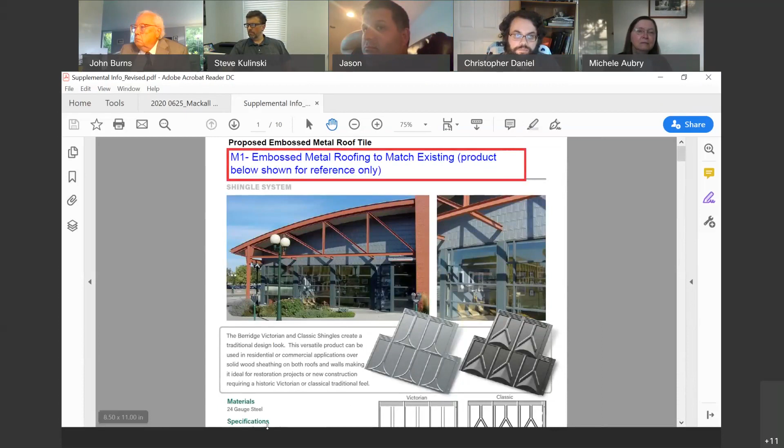Pardon me for interrupting, Laura. Do you know— there we go. The question was, can the documents be presented? And do you know, Laura, if the pictures are going to be presented also of the windows that we took? Were they in the submission package? Yes. We have one of— it was a different folder because I did not put everything in one folder, it would have gotten too big. I sent a folder that only had pictures. Okay, let's see if I have it. ARB members, were you able to see the photos as submitted? I did not see any photos. Okay, no.

Nicole, I'm going to try to look for the photos. So if there's anything on the presentation that you want me to go to, just let me know. Apologies, I only have audio, so I'm not sure what you're even reviewing at this time.

The application is virtually the same. I guess we clarified what materials were going in each location as part of the submission package with the materials key.

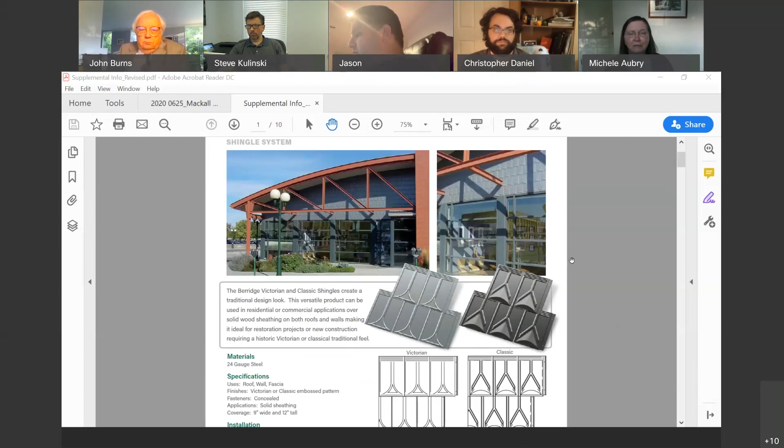Yeah, as we had been saying, that's just an example. That's not the actual product or the design. We'd need to match up to what was there, that's the intention.

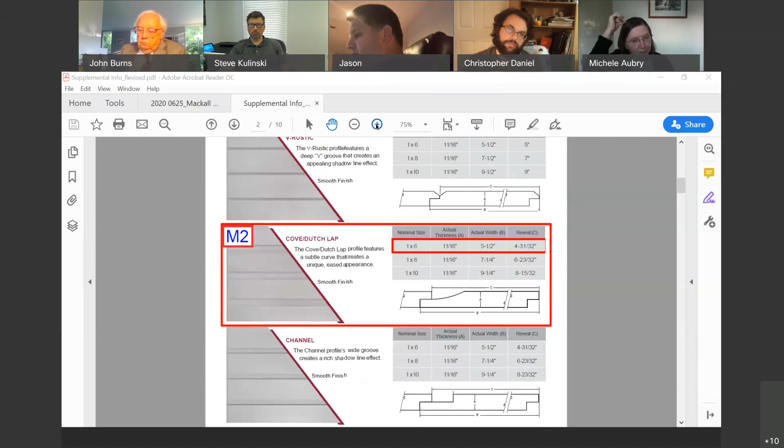The second page is the cove lap or the Dutch lap siding that is within fractions of an inch difference from the existing, which was below the cedar shake or wood shake siding applied at a later date. That's M2, material 2, which keys to our elevations.

Understood, previously there was some desire to understand what each material was going to be, so we tried to clarify that on the elevations as well as through the supplementals.

This next slide, page 3 of 10, is the proposed flat stock trim for the corner boards, pretty much the exposed trim we propose to use. This is also an AZEK inert material product that would not be a rotting material.

This is rot resistant. I think on the key on the elevations, we indicated all of these to be smooth finish, so there was no ambiguity or mix-ups at a later date in the field.

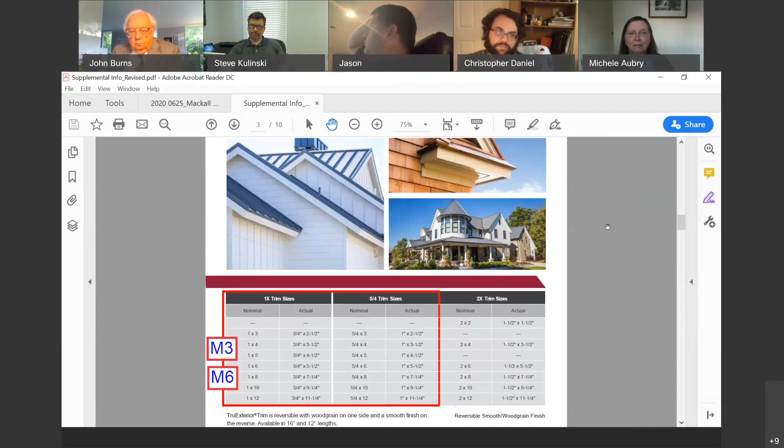Then the next, 5 of 10, is the windows. We're proposing to use that double hung product as a replacement by Loewen, with a putty profile, 5/8 of an inch, low E double glazed glass.

The next page, I'm sure you're all familiar, I think we looked at it last time. 7 of 10 is the photo from 1918 of the house, showing the little porch on the front, which we discussed last time that we're bringing back to the project, and the cove lap siding.

Here's the next one, the blow up of the existing cove lap siding, which is in disrepair in several spots and also missing. So we're proposing to replace it throughout with a matching product, the AZEK.

9 and 10 is just the flat stock casing, which we would be matching in the AZEK product. And then 10 of 10 is the embossed tin roofing, which links back to the first page. As you can tell, that's what's on the house. We believe it's maybe not original, but that's a good material maybe to retain.

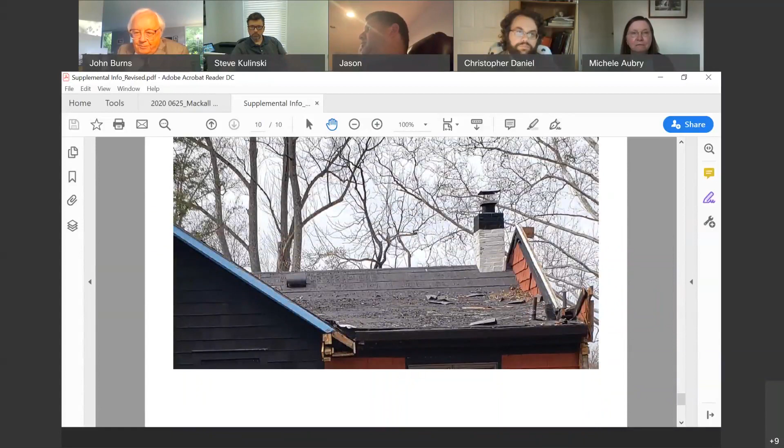Okay, is that your presentation? Yes. Okay, I guess the plans more or less remain the same from the previous time. It's just clarifications to the materials as requested by the board.

Okay, thank you. The first question is, are there members of the public who would like to address the ARB in this particular application? Laura, can you keep an eye out if anybody raises their hand? Yes, I will.

I don't see any at this point, but I will let you know if that changes. That being the case, I will go through the roll call of members of the ARB for any questions or comments they might have.

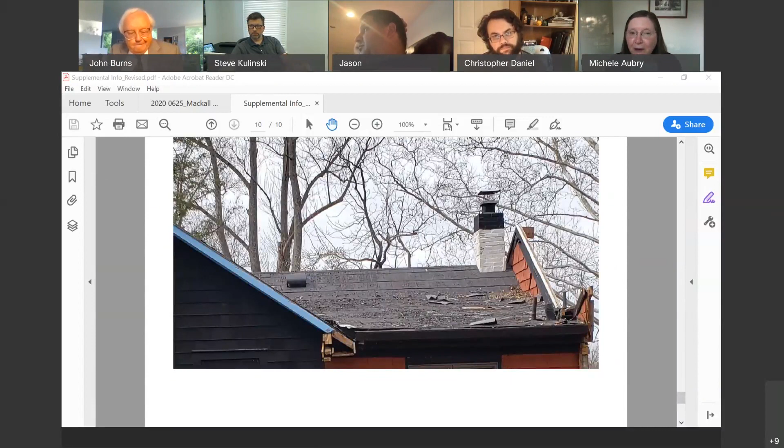I'll start with Michele Aubry, please. I'd like to thank the presenters for the information and the follow-up, and I have no questions for them.

Thank you. Okay, Mr. Daniel. Again, I'll echo Ms. Aubry's comments. Thank you to the presenters for working through this interesting technological time we're in. So I guess I'm trying to understand the presentation about the windows. From what I understood, we've evaluated that many of the windows were not original. There are some remnants of what might be original, but the materials, from the architect's perspective, were not considered enough to salvage. Is that the understanding I was coming away with?

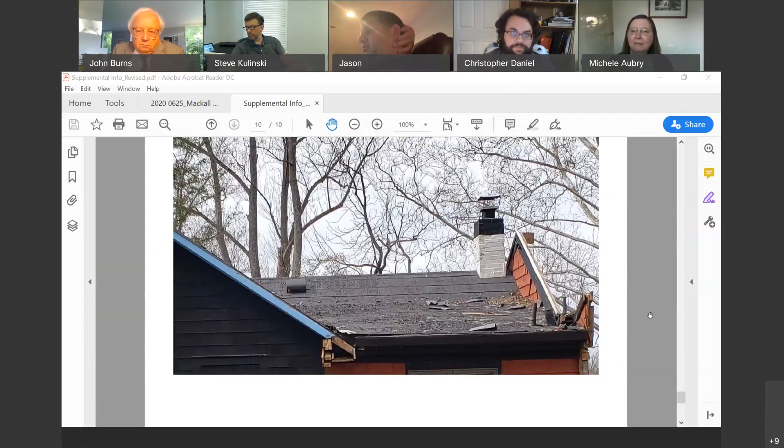Beyond that, I appreciate you bringing in the materials. Obviously you're matching the shingles on the roof, and I don't have a great deal of questions at this time. I'm honestly just happy to see if this house is going to get a chance at life, because in previous reviews for previous projects it seemed like it was going to be condemned, put on the chopping block. So I'm happy to see that it's going to get a new life. I don't have any further comments at this time, Mr. Chairman.

Okay. Samantha Huang? Yes, thank you for the presentation. I have no comment.

Okay, Mr. Kulinski? There we go, sorry about that. I'm satisfied with the changes that have been made over the course of the couple of workshops here, so I'm fine with this. Thank you.

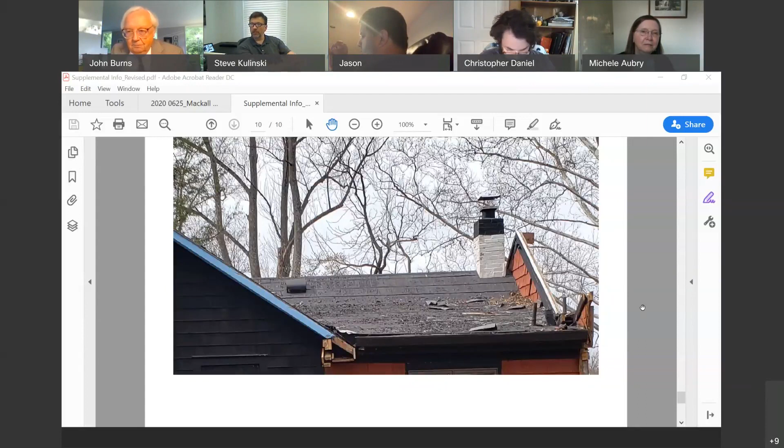Okay, Elise Murray. I want to thank the applicant for hanging in on what has been a very long road. I'm very happy to see where it's going now. That's the end.

Okay, Kate Orr. I think it looks lovely. Thank you so much for your hard work.

Mr. Zellman. Thanks for the presentation, but no questions. Okay, I have a question.

Nicole, could you go back to the photograph of the cove siding? It's an end view of a piece. There you go. And that one, we clearly see that you're able to take dimensions and such on that. I'm wondering how close is the proposed replacement siding to the actual dimension of what we're seeing in this photograph?

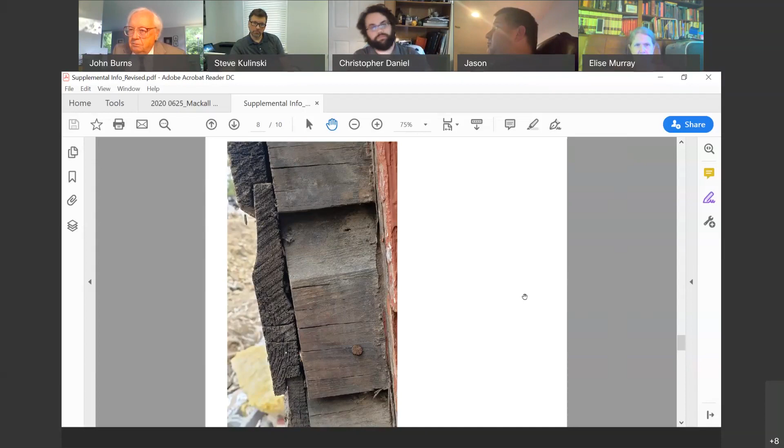Yeah, it's remarkably close, which is very unusual when you have the difference between wood versus the other. But I'm assuming they patterned it off the differences. I believe the cove is a little bit different, and I believe the flat portion of the original, where I guess it was hand done, is a little bit longer. The overall length, I believe, is within a half an inch of the modern replacement product.

Okay, thank you. I just wanted to make sure that they were not dramatically different, because that can affect the visual appearance quite a bit. Other than that, I will echo the other members of the board. Thank you for doing that. Thank you for specifying that the trim will be installed smooth side out. That was one of my questions from last time around. Thank you for verifying the age of the existing windows. For me, for my purposes, that's adequate justification that they can all be replaced without compromising the historic character of the property.

That's the end of questions from the board. I would entertain a motion with regard to this particular application.

Mr. Chairman. Mr. Daniel: So Chairman, I move that the ARB approve ARB 18-LFK-06 amendment located at 1011 and 1013 Turkey Run Road, tax map 22-3, double paren 1, 50 and 51, located in the Langley Fork Historic Overlay District, for the proposed architectural modifications to the existing Mackall house as submitted and presented at the July 9th, 2020 ARB meeting. Upon review of the materials, the proposal is found to meet the requirements of zoning ordinance 7-200 historic overlay districts.

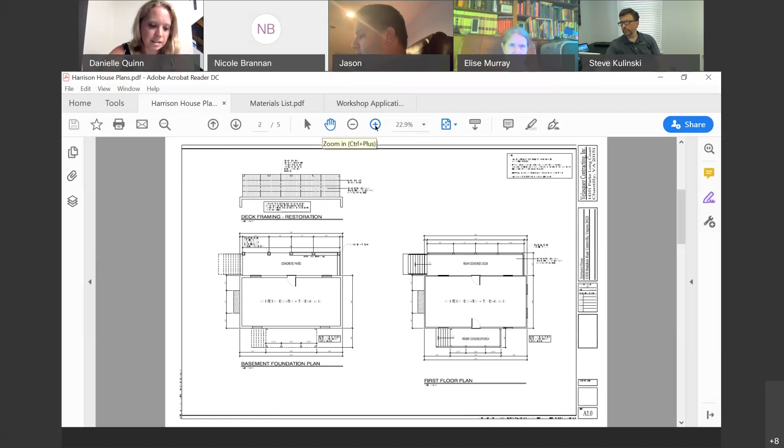On the Harrison house, what we're looking to do is replace the back deck that is completely rotted through and no longer stable. So as you can see from these plans, we'll be securing the joists that support the deck, be taking out all of the deck rails as well as the footing on the deck and replacing that with identical wood, sealing it and painting it with a natural sealant in order to preserve the integrity and the historic nature of the deck as it has been. Our plan is that when the deck is finished, it will look identical to how it has for the past few hundred years that the house has been there.

The concrete patio that's below as the foundation won't change. We'll just go ahead and seal that to keep any water from getting inside. Also provided in the packet that was provided to the board is our materials list. As you can see from that list, all of the deck posts that go in will be cut to the exact dimensions of the ones that are currently there. Nothing will change as far as the size and structure goes.

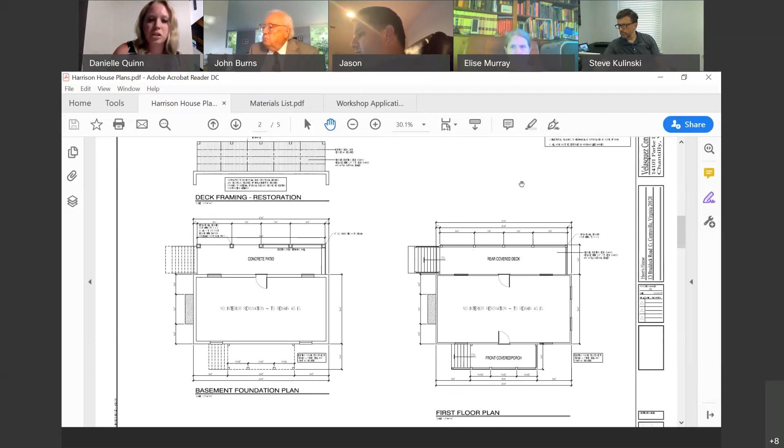The other proposal before the board is for the chimney. What is the main thing that's changed on the chimney is once our architect came back and looked at it again, he put a level on the chimney. And initially it was believed that the chimney was pulling away from the house and there was concern that the chimney was going to collapse. However, the issue is that the house is actually pulling away from the chimney. The chimney remains level, whereas the house is starting to tilt to the side.

To resolve the issue of the gap between the chimney and the house, we plan to pour concrete in that will not only help seal the gap between the two, but help anchor the house onto the chimney. Once the concrete's poured, it will be covered with a sealant to prevent water from getting in between and to prevent water from getting into the house. It'll all be a natural stone color so that you won't be able to tell a big difference from the existing stone chimney and the gap that's being filled.

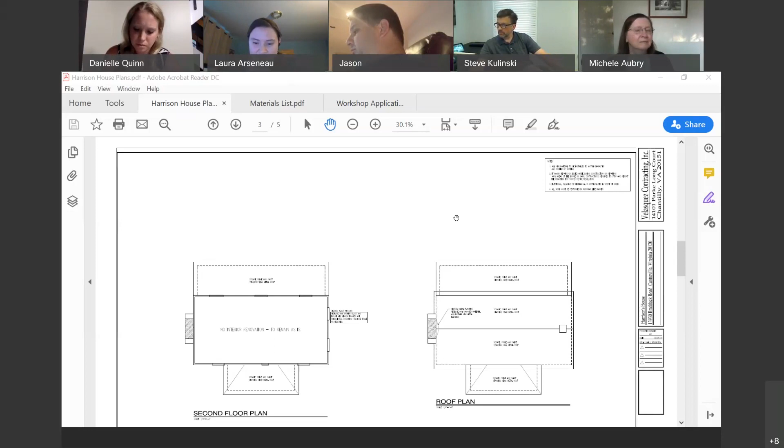I believe that anything related to the decking, and I believe it was the chimney that were in the notice of violation - that's kind of like a phase 1, phase 2 type thing. So the code violation and things in the code violations were the chimney and the deck. So if there's something with the deck and you have a design issue with that, that would be within the scope of this approval.

All right, I think it would be a mistake to use composite materials and kind of dilute the historic nature of this pretty well preserved house. Obviously it needs some maintenance, but most of the historical material is intact, and I applaud the applicant for matching, cutting and reusing beams where possible. But if I were to have my say here, I would say we do not allow the Fypon or the composite decking. The other issue, apparently not in our purview here and not necessarily as pertinent, but the gutters aren't the appropriate style for the house - but it's an item that's easily reversible, so I'm not so concerned with that aspect. But overall, great, and the in-kind terminology is so much better than before. I'm happy to see this. Those are my comments.

Thank you, Mr. Kulinski. Ms. Murray. My colleague on the History Commission from Centreville is very happy that the chimney will remain in place, intact, not changed at all. I share Mr. Kulinski's concerns about the man-made materials for the decking and railings.

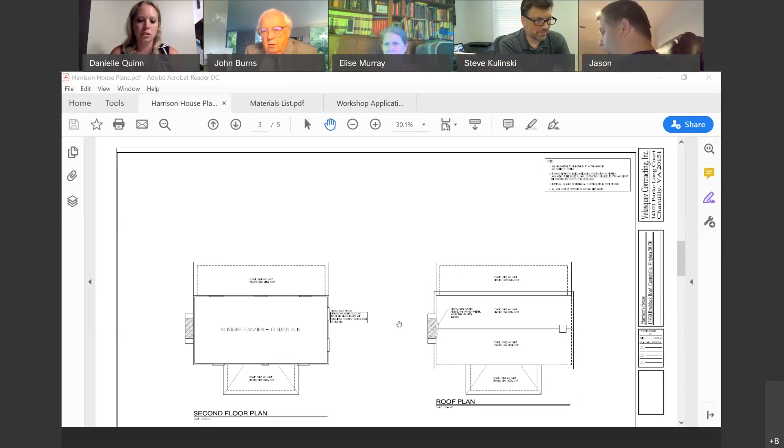What is the purpose of using concrete as that material, as opposed to bridging the gap with, say, wood like the rest of the house? If we were to bridge the gap using wood, then the side of the house isn't going to be flush. It's going to protrude out some, instead of just making it look as if the chimney was a wider structure than it actually is.

Okay, but if the gap filler material is concrete, what is the material of the chimney? Forgive me for not knowing. The chimney is just a stone and concrete structure. So it will look like there's simply a wider mortar joint when you're finished with this treatment.

Is that the intent? That's correct. Okay, all right, I understand that. Thank you for the explanation.

I do share Mr. Kulinski's concern that Ms. Murray echoed about the use of man-made materials in a very visible part of the deck. I understand your concern there, but without access to the owner to actually answer the question tonight, I'm a little perplexed as to how we might deal with that issue that's been raised.

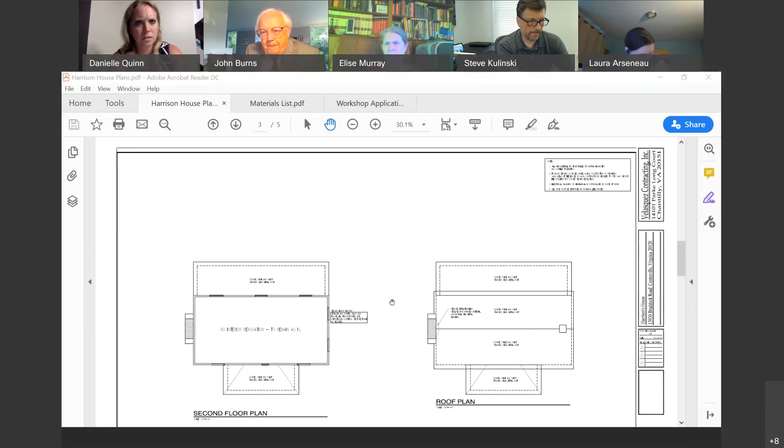Mr. Chairman, I'll note on the document that was sent, it does have the line, 'if acceptable, install composite.' So that does imply there was a recognition that it might not be acceptable, but I don't know where that's coming from. If we need to use wood in order to get the ARB's approval, then we will use wood, the same type of pressure-treated wood that we're using for the posts.

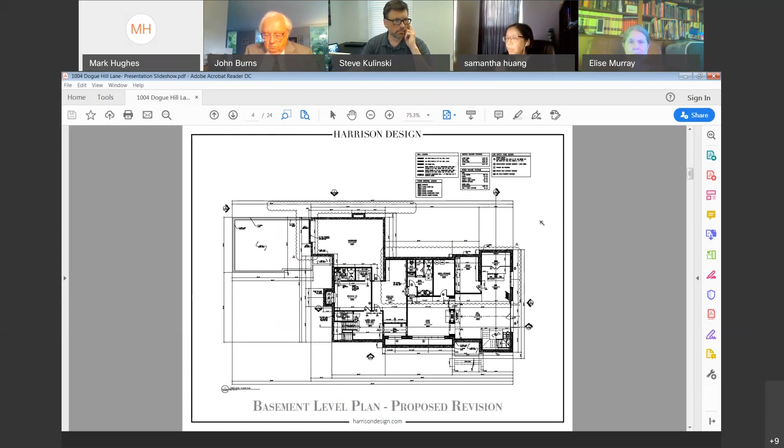So the original floor plan in the basement, after some talk again with the realtor, it was proposed that we actually enlarge the space below the loggia, the upper story loggia. If I flip to the next one, you'll see in the back here, under the loggia, we've increased the floor space, just increasing the square footage of the house. Remember, this is a spec house to be built and sold, so the idea was that it would better serve the clientele, the marketplace. This is a minor change, not something you can see on the exterior at all. It's totally underground in the basement.

On the main level, there are very minor changes. On the right side of the back, there's a study, we simply moved the windows a little bit wider, same size windows, just slid them a little bit wider within the room to make a larger center built-in cabinet, that's all. If you focus on that study in the back, I called it the study, the library in the back there - if you flip to the next one, these windows just slightly moved out to the front and rear wall a little bit, within a few inches.

Conversely, on the main level, in the kitchen, the 2 windows on the left side elevation around the range, we kept them in the same spot, we simply made them slightly larger, slightly wider windows. I believe they're the same height. That's the only changes on this level. Oh, I'm sorry, there is one more change. On the garage, it's kind of hard to see here, on the back, because we've added 3 windows, but these are transom windows set high on the wall, so they're shown dashed in on the concrete retaining wall of the garage rear wall. You'll see those in the elevation. There are 3 windows added there just to get daylight into the garage, and that's on the back of the house.

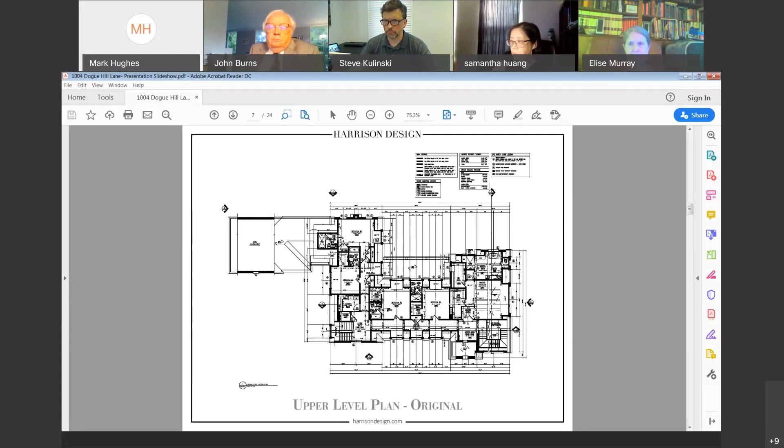On the upper level, the main change had to do with enlarging the master bedroom suite and taking bedroom number 2 into the master bedroom suite, which was laid out in another way to make it a better bedroom. We moved the sleeping area to the rear wall, to the rear yard, so there's a better view than just a side view. We conversely moved the closets around, and bedroom number 2 became a larger master bathroom.

So in effect, on this floor, the change was we went from 4 children's bedrooms plus a master suite to 3 children's bedrooms plus a master suite. That was the main generator that caused the changes on the outside, because some window dormer locations changed.

On the right side of the house, one other thing we did on the upper level was suggested by the realtor, to add a window to the laundry room. The initial approved scheme did not have a window in the laundry room, so we added a small dormer, like the other small shed dormers, into the laundry room, on the left side elevation. We'll see those together as we move through here.

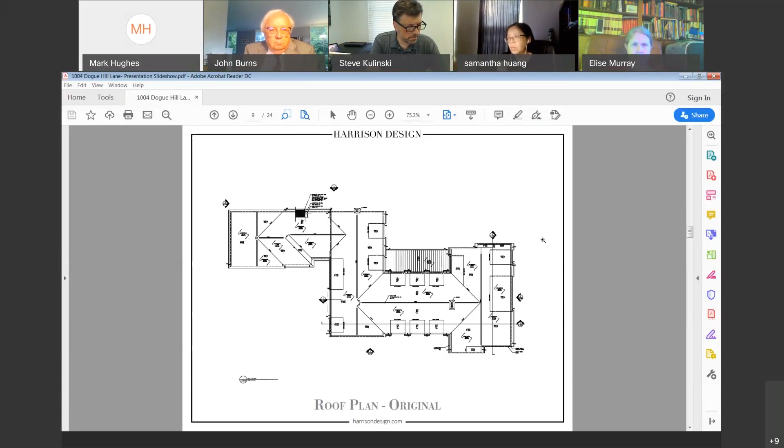You see right now the original roof plan. Basically, on the original plans, all the dormers were shed dormers. Most of the dormers stay in the same place. The ones on the right side changed location slightly, and we thought it was better to make those gable dormers. We also added a small shed dormer on the left side.

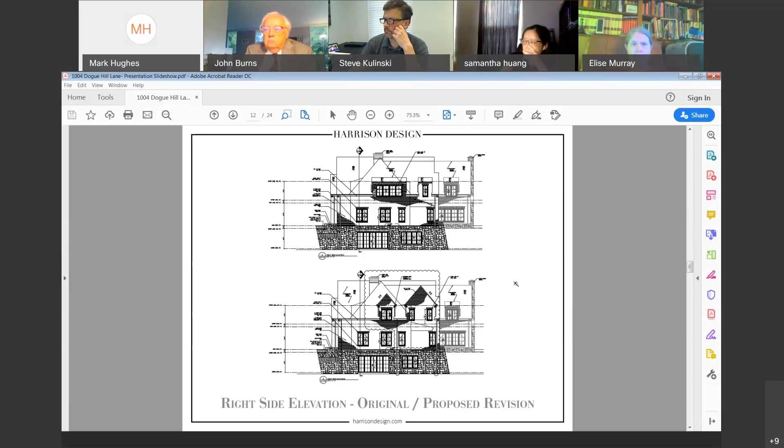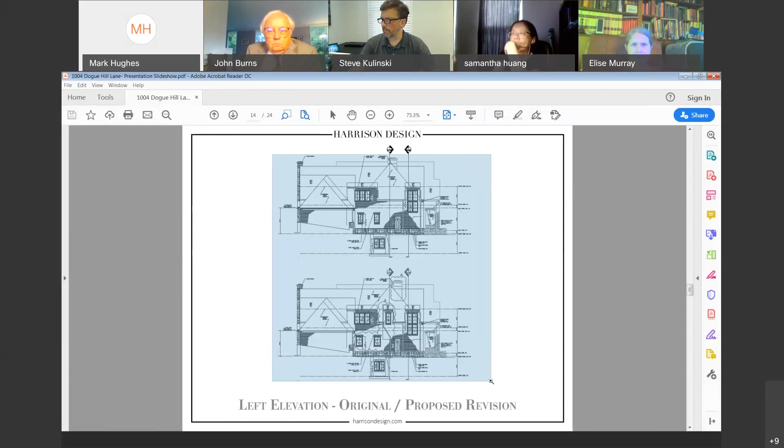And then the last elevation on the left, the upper one, is the original again. The only thing we've done here is inserted a small single shed dormer between the existing other dormers. That dormer is just to bring daylight and view into the laundry room on the upper level. That's the only change you can see there.

The site remains the same. Nothing changes with the site.

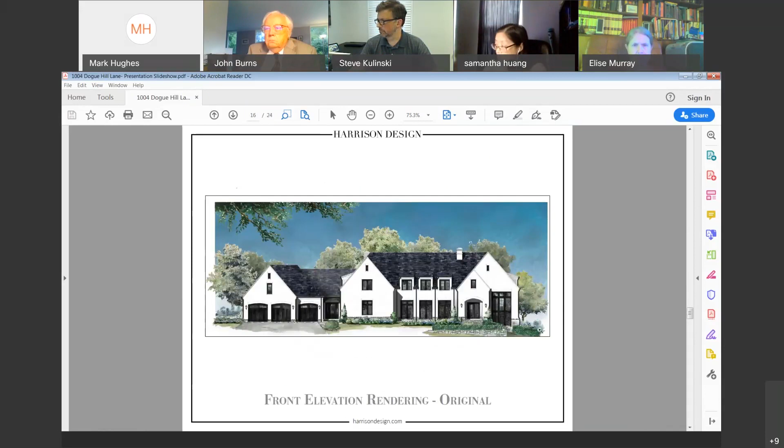These renderings will give you an idea of the changes. So there's the original with the shed dormer on the right, and the proposed, again the only change, has a gable dormer on the upper right roof.

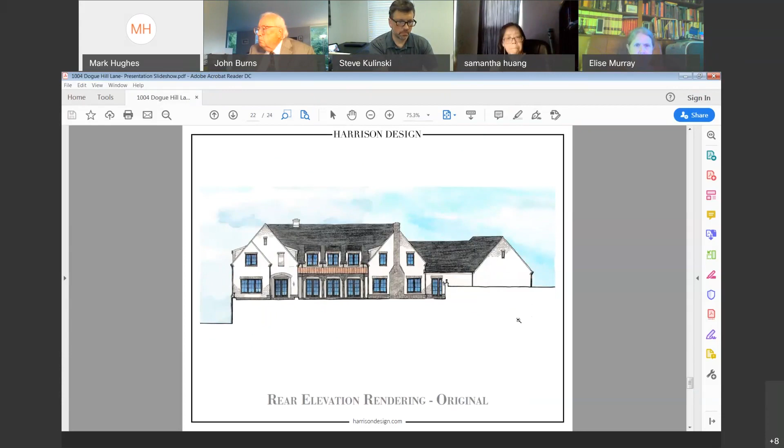What's after this? This is the rear. We talked about the rear there. We went through the changes in the rear elevation already. This is just another view of that, showing the grade changes I believe.

The materials stay the same, nothing else has changed. So again, it's simply that some of the interior layout we propose to change, and in some cases it affects the exterior, we think in a moderate way. The biggest changes have to do with the dormer locations in some cases and the type of dormers. And that's the presentation.

Okay, thank you very much for that. Is there any member of the public who would like to address the ARB on this particular application? You can indicate so by raising your hand or using the chat function.

Okay, well then I will go around and poll the members of the ARB. Ms. Aubrey.

Mr. Chairman, thank you. I thank the presenter for his remarks, and I have no comments or questions.

Thank you. Mr. Daniel? Thank you, Mr. Chairman. Yes, I remember this review from back in the day. I think, as the applicant pointed out, these are relatively minor changes in comparison to the overall structure itself. I don't have any further comments.

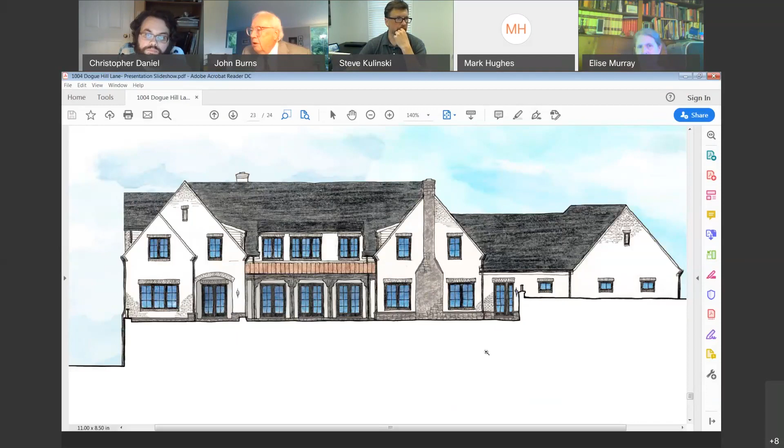And this is just to remind everybody, this is the rear of the house, which really cannot be seen by anybody other than their neighbor across. I see what you're saying. Okay, all right, thank you for that explanation.

Ms. Orr, any further questions? No, thank you. Mr. Zellman? No questions, thank you.

Okay, I do have not a question, but an observation. I noticed you didn't mention this, but the position of the main chimney that's visible in the front of the house has moved. I had always thought it was slightly underscaled for the size of this house, and in its new location, I think it's a little more prominent, and I think actually it looks better. That's an aesthetic judgment, but...

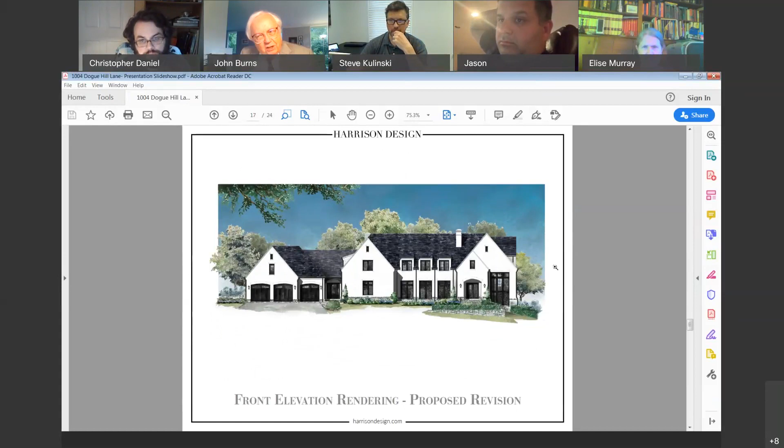There's the original, right? And if you go to the next slide, there's the proposed. Also in the roof plans, the two roof plans, it appears as though it got slightly wider, but in the front elevation rendering, it did not change in width.

I'm not sure I understood your question. It did not, the house did not change in size. Go to the roof plan, original, okay? Then to revision, it appears as though it moved, but then it also got wider in the proposed.

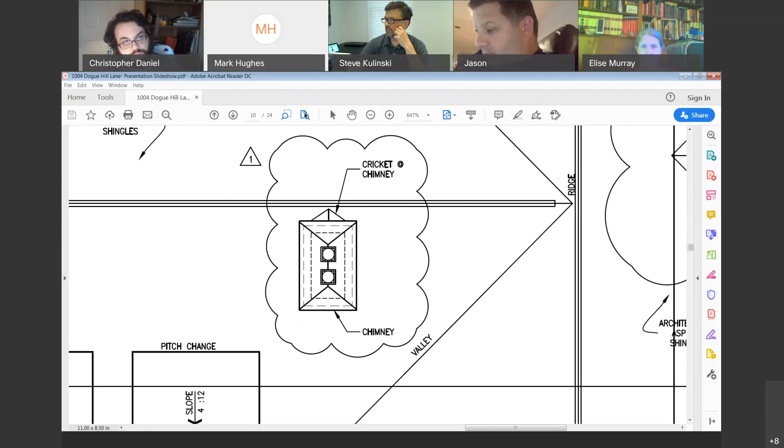It shouldn't have. It should be the same size. It looked like that to me. Yeah, it shouldn't have, but it does look like it. It shouldn't, if I recall right. It should be the same size. But moved, whatever, I think the position gives it more prominence on the roof slope, and I think that actually is an aesthetic improvement.

Okay, those are the questions that I have. We've gone through the entire board. Is there a member of the board who would like to make a motion on this particular application?

Is there a second to the motion? Second, by Mr. Zellman. May I propose a friendly amendment to the motion in that this is not an existing house, this is a proposed house?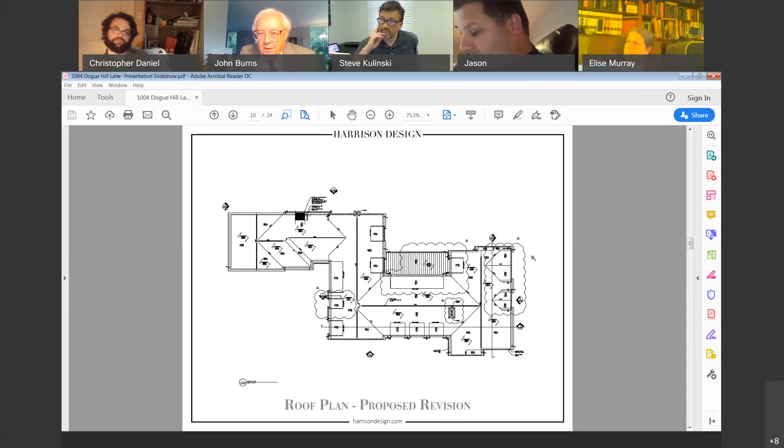Could we make that change? I don't believe it's constructed, is that correct? No, sorry, when I say existing, I mean it's the prior approved plan versus the proposed plan. Right, so Laura, can we change that from existing to previously approved or previously proposed? Actually, previously approved, since we did approve it. That's right, sure, that's fine.

Okay, and is that friendly motion acceptable to the maker of the motion? Yes, it is. And is it acceptable to the seconder? It is. Okay, thank you. Further discussion on the motion? Hearing none, I will call the question. All in favor of approving the motion, say aye. Aye. Aye. And all opposed, say nay. Hearing no nays, the motion carries. Thank you, gentlemen.

That is the last of the action items on the agenda tonight, so now we will move into items in a workshop session. These are presented for information purposes. There's no public comment for these things. These are for applicants to propose projects and for the ARB to give them advice and guidance prior to actually submitting them for a formal action item. Items numbers 5, 6, 7, 8, and 9 are all projects that are going to propose to use the Virginia state tax credits or the federal preservation tax incentives.

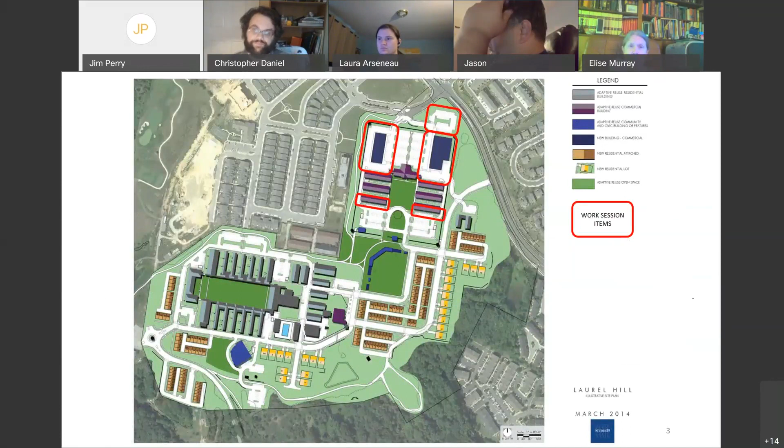This slide shows the parking lot to be built outside the prison walls adjacent to Silverbrook Road. The suggestion from the ARB last month was to look at options for additional screening of this parking lot without obstructing views of the historic structures. In response, we added a hedge along the northern and western edge of the lot, selecting material that will get to be about 4 or 5 feet high over time, screening the lower portion of vehicles while still allowing views over the top to the historic structures beyond.

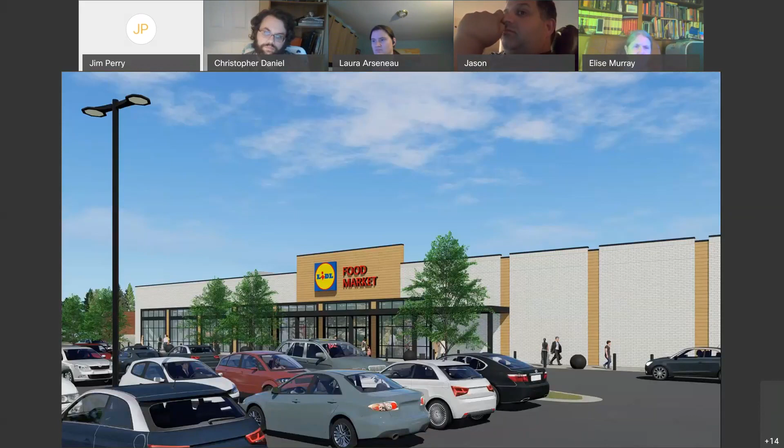For the grocery and retail store, I'll turn it over to Frank Watkins, one of our architects, to present the revised architecture, comparing it to the building to the west. We have legal representatives on the call to answer any questions you may have. Good evening, this is Frank Watkins.

You're looking at the revised design for the Lidl food store. In the previous presentation, the architecture of the retail building was better received than the Lidl. Comments were that the billboard nature of the original design should be toned down, the variety of materials reduced, and the rhythm and connections to the historic structure incorporated, with a preference for the steel and glass pavilion character of other Lidl stores. In this revised design, we've considerably reduced the wood, increased the glass, and reduced the overall mass of the building. We've introduced vertical accents in the masonry walls and storefront establishing the rhythm recognized in the retail buildings, and incorporated the same metal canopy treatment as the retail building, modeled after that used at the historic buildings.

The increased glass achieves greater transparency, softening the building, reducing the impact of its mass, and establishing it as more of a glass and steel building rather than the predominantly masonry character of the original scheme.

These next two images are of the retail building. We haven't made any changes to the retail building; these are shown to demonstrate the consistency with the Lidl building.

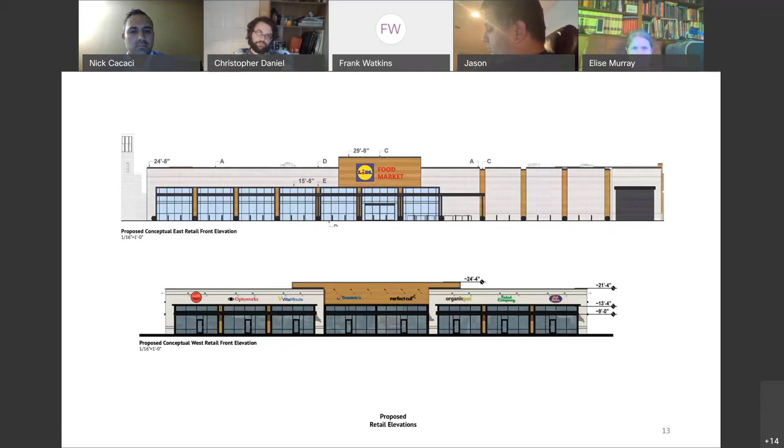We prepared again these revised site sections to be consistent with the currently preliminary layout of the mechanical equipment, so we have 3 sections taken through the sites.

Just as last time, some portion of the rooftop equipment can be seen from off-site. Be reminded that the trees are not shown and that this view is from over 400 feet away from the building.

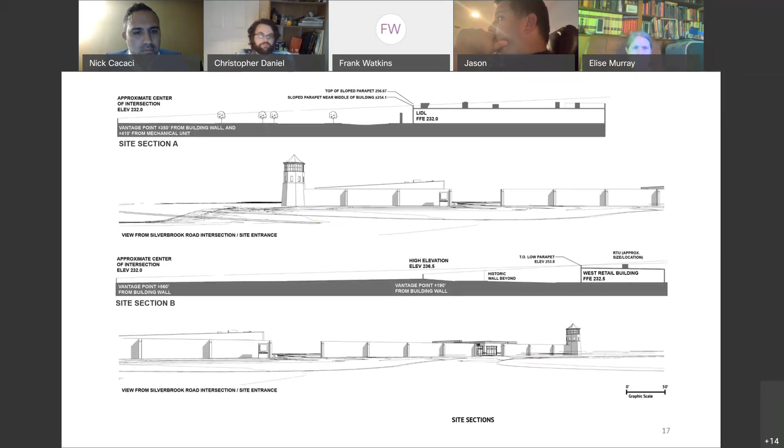Sightlines from within the walls are similar to the past presentation. The historic towers can still be seen. Small portions of equipment can be seen on the Lidl. We feel it's better than raising the parapet walls and increasing the mass just to completely screen the equipment.

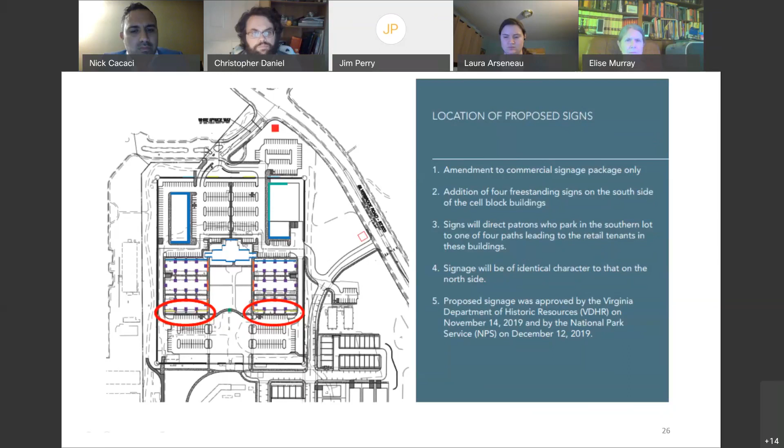This shows the signs that we're proposing. You can see there are 2 for each building, 1 adjacent to the arcade on the inside. This drawing doesn't show the quad—there's a lot more space between those 2 buildings. And then there are signs on the outside.

You can see we have 3 different options based on the tenants we're trying to accommodate, 1 to 3 basically on each sign. It also shows you the general location where these signs will be located, and gives you a good idea of the scale of the signs relative to the scale of the mass.

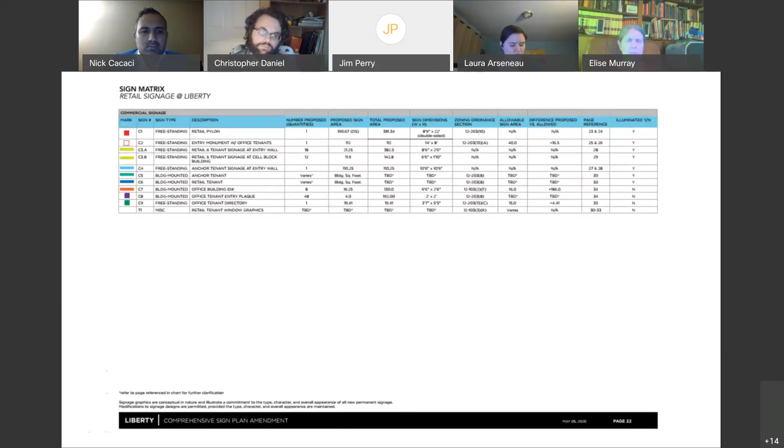The next 2 slides are just a lot more detail for the commercial signage associated with the project. These are sheets just right out of the approved comprehensive sign plan, just for context. I think I sent this to you last week. Please—again, that's just a lot more detail for the signage that's already approved for the site.

Is there any questions? Hey Jim, there's a lot of static or echo in the background. I'm not sure if it's from you or someone else on the team, but the last part of what you were saying got really muffled. Can you go back, for Eric?

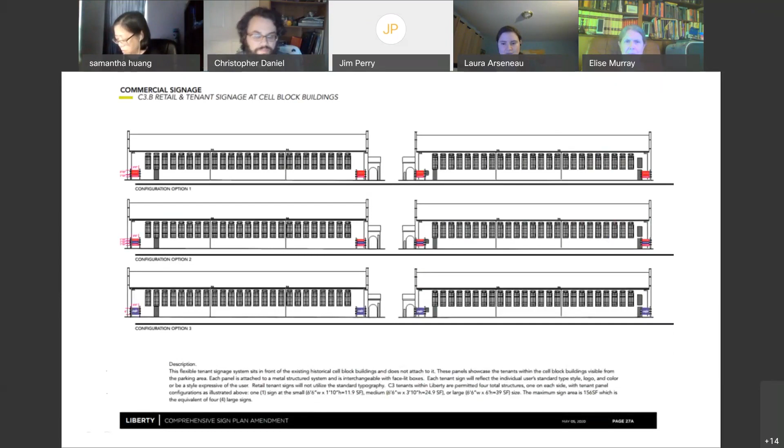Okay, thank you. Great, thank you. If that's the end of the presentation, I think I'll take a cue from—we don't do citizen comments during workshop items—so I'll take a cue from John and just go down the list. Ms. Aubrey.

Thank you. I do want to thank the presenters for all the work that has clearly gone into the redesign here. It's a much improved appearance of the proposed architecture for the grocery and the retail. And I appreciate the fact that these 2 sides of the development mirror each other in their design, in their materials, and in the colors that are being presented. So thank you very much for all that effort. I think it is a much improved product.

All right, thank you, Ms. Aubrey. Ms. Huang? Samantha? Yes, thank you for the presentation and effort. I have no comments too.

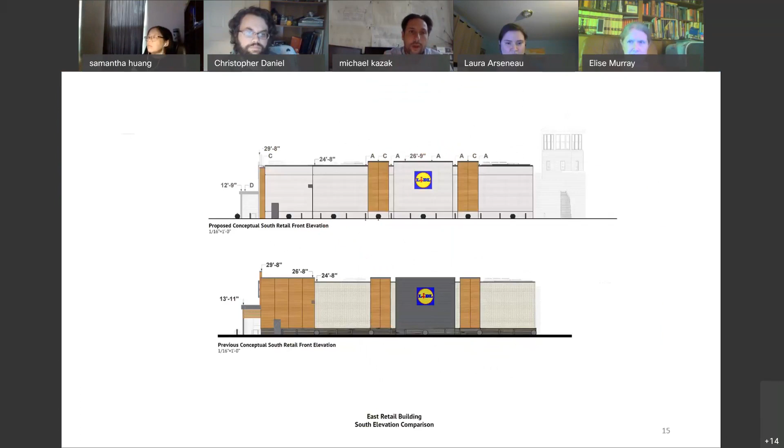Certainly, hello and good evening everybody, thank you for your time attending this workshop and for your feedback on the last one. To answer your question, ma'am: yes, the public and front facing, front and side elevations are going to be brick, wood panels, steel and glass. The sides facing the wall are going to be dryvit or stucco, if you will. We figured that since the historical wall is screening those from public view, and nobody's really going to be back there seeing them, we wanted to put our best foot forward and have the more durable, more historic materials facing the public. So to answer your question directly, yes, the rear elevation that faces the wall is planned to be dryvit or stucco.

It's my perception, and it may just be perception, that those materials get dirty and yucky looking more quickly than brick. Is that correct? Typically, yes, both will need cleaning over time. But we wouldn't be able to see that rear elevation from public view because the wall is going to block that. The only way you'd see it is being behind the building, between the building and the existing site wall.

That's it, all my comments. Thank you, Ms. Murray. Ms. Arseneau? I too appreciate the improved dialogue and have no further comments.

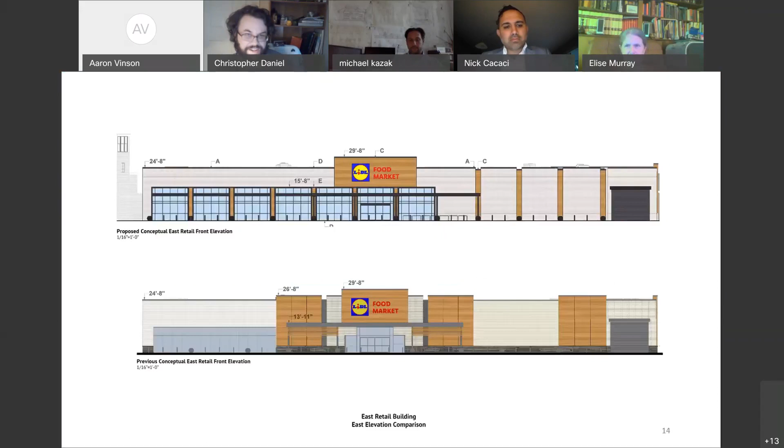The other question I had, shifting off these designs, was to the sign thing, and I just don't feel like I'm looking at that. I was not quite sure, Jim, what was actually changing. It felt like we were just maintaining more consistency in signage. So I really got lost looking at that signage package, and maybe I was really missing the point.

So next slide, Aaron. I apologize if too much information was confusing. These four signs you see proposed here are not part of the comprehensive sign plan now, so we're seeking to add these to the sign plan. We kind of view it as an oversight - they should have been in there originally, we just didn't think about it. It didn't really become an issue for us until we actually started having serious conversations with potential tenants for those structures, and the question came up: well, how do people know where I'm at? How do they find me? And if the door is not facing the parking, it's perpendicular to the parking, and somebody needs to go down that arcade or down one of the outside sidewalks, how do they know where to go?

Okay, all right, yeah, that was what I was missing. I think I was missing that - maybe I lost that in translation there. Okay, well, we talked the sign plan to death, and honestly I don't have a problem there from my perspective, so those are my two cents. Obviously I don't have any other board member observation on the signage stuff, now that I brought that clarification, but otherwise, unless there's another member with a comment, I'll turn it to you, Jim, and your folks, if you've got any other questions.

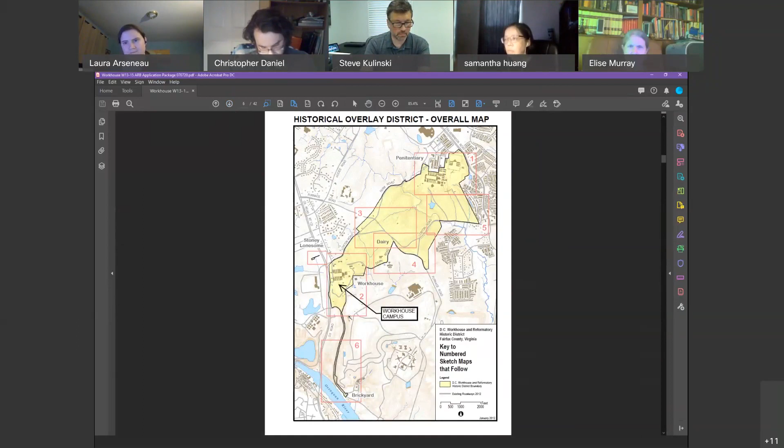Now, to give you a general overview, let's start with a historical background. The Workhouse campus is located in the DC Workhouse and Reformatory District, just off of Ox Road in Lorton, Virginia, as you'll see here in the historical overlay district. The Workhouse campus is here toward the south end, just east of Ox Road and north of the Occoquan River.

The Workhouse campus has several buildings, and the buildings in question here, 13 and 15, sit on the west end of the site, just across Workhouse Way, and they basically act as a gateway into the central courtyard space of the campus, with Ox Road on the west side.

We have a few interesting aerial photographs of the campus as it progressed through the last few decades, and really not much has changed over time. The site features have, for the most part, been preserved. As you can see, buildings 13 and 15 sit here on the north and south, just on the west end of the central courtyard space, with Ox Road on the left side. The Workhouse Way was not added at this point. As you can see, we still had some arcades connecting to the buildings.

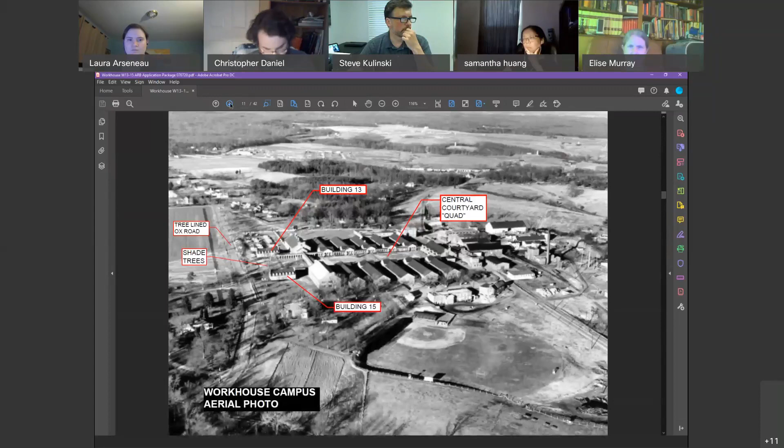Here's another view which shows some of the tree buffers that were planted along Ox Road and in the courtyard space between the two buildings. Another site feature you might find throughout the historic district were these entry gateways and brick signage piers that you'll see referenced in our concept later on.

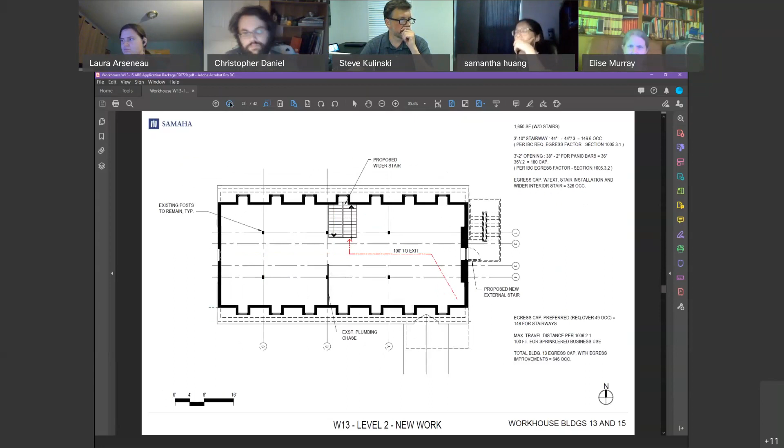We'll be doing structural repairs. As you can see, these are the red walls for shear reinforcement. On the second floor, we'll be removing some temporary shoring columns currently supporting the roof due to damages, opening up the plan to allow for future tenant use.

On the exterior, we're doing our best to maintain the architectural character. We're not touching anything unless absolutely necessary—in this case, just the main entry. Currently that's a modern door, and we'll try to provide a more historically correct entry.

All the repairs will be done in kind, with the same materials. If anything is to be replaced, it will be in kind, and windows will be patched and repainted to match the architectural detail.

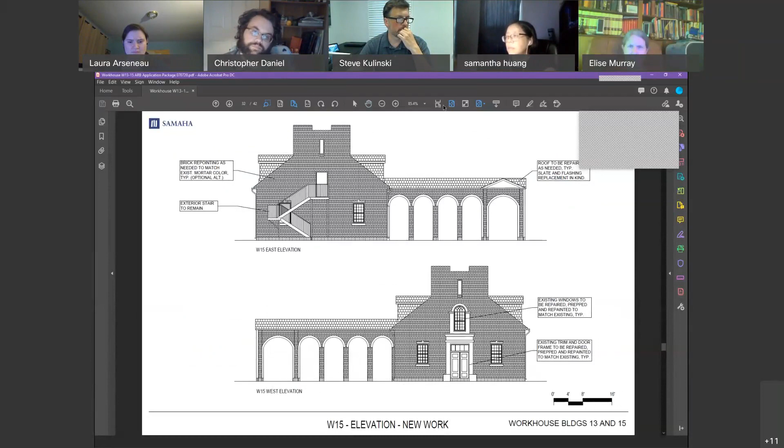Again, these are the elevations for building 15. Everything basically looks the same, except for the exterior staircase, which will remain.

I believe Mike Norton's also on the line. I'd like to hand it off to him to explain the concept for the plaza. I am on the line, but I don't think I have control, Jenny, so you might have to forward for us. I don't know unless he has the screen open or the same presentation—I mean, we can do that too. If you want to just toggle through, I could just flip for you. Yeah, if you could just, yep, that'd be great. Thank you.

What we're looking at is the main quad—on the right, or east side, are the improvements that have been done over time. Workhouse Way is partially centered on the drawing, north to south. We're looking at the area between Ox Road and the multi-use path, a space that would invite users of the multi-use path into the site and begin to experience it, with two entry points to the north and south, concrete pathways at Workhouse 15 and Workhouse 13, and screening trees reestablishing the canopy along the multi-use path.

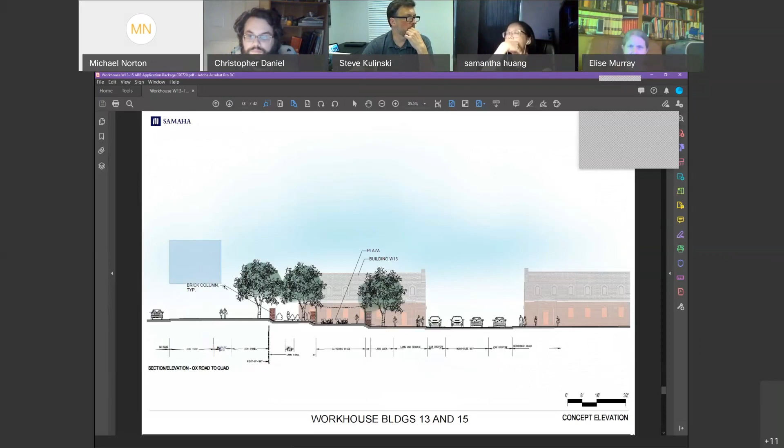This will be a small section from Ox Road down into the Workhouse complex that shows the grade change of 6 feet and how that would occur with the pillars we have indicating at the grade change, and that goes back to what Jenny was showing with the historic pillars discovered as part of this project.

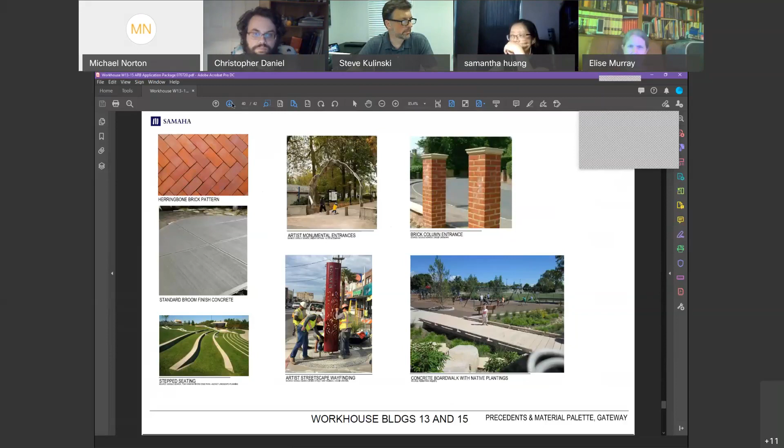Again, looking at different ideas because this is a potential arts area. Looking at different monumental features, we did start settling on the idea of the brick, but we looked at different ideas for art features, gateway entrances, and different boardwalk features to bridge the gap of the stormwater facility - not as a boardwalk, but as a way to soften the slope that's out there and use it as a gathering space.

Good. And that's where we are on the site.

All right, thank you for the presentation. I'll turn it over to my board members - Ms. Aubry.

I have no comment. It all looks like a great plan, and I look forward to seeing it developed. Thank you.

All right, thank you. Ms. Huang? Samantha? Sorry for the waiting. Oh, it's okay.

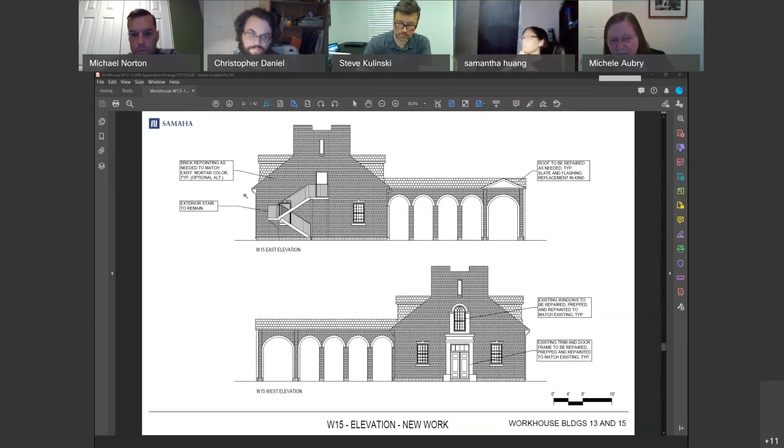We have the historical photos here. Let's see, let me go back to that. I believe the connections were to the arcades on the main plaza, but I believe those must have been removed, or rather cut short, when Workhouse Way was brought across the site.

Okay, I wish you'd look a little further. I think I like what you're planning to do for the plaza, but it would be nice to know what had been there before. I thought it was in that spot between 13 and 15, as opposed to on the other side of Workhouse Way. There was something there.

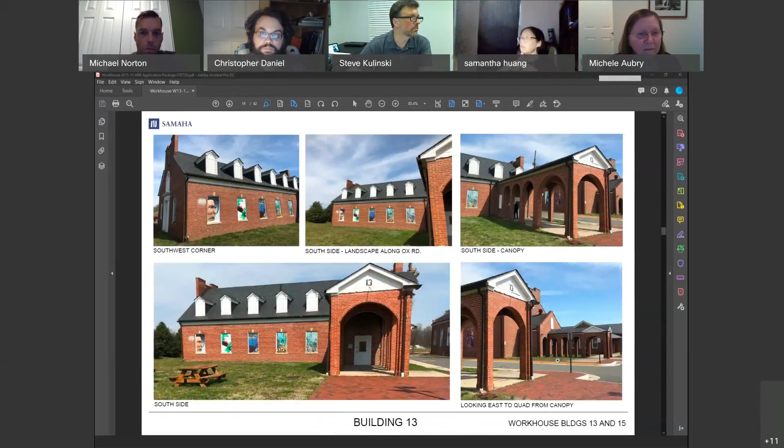So we looked around in the historic district and found some similar examples, and this is what that was referring to. Where did you—somebody said that. Did Mr. Norton say he saw pillars? There were traces of pillars in there. For the concept, I was referring back to these photos, and that's all I had. I swear I've seen something else, but I don't know if I have possession of it.

And most of—I think you should look a little further. Oh, I don't mean to interject, but if you look at the historic aerials from the county's ArcGIS system, I was pulling that up while we were talking about this. There always seems to have been a large opening in the space. There was at one point a brick wall you're talking about, but I think that was in between where Workhouse Way was, what you're thinking about.

I wish I could share it easily. I know what the aerials show, but I really think that sometime before 1937, since the project started in 1915, there was something else there. Ah, okay, I misunderstood you.

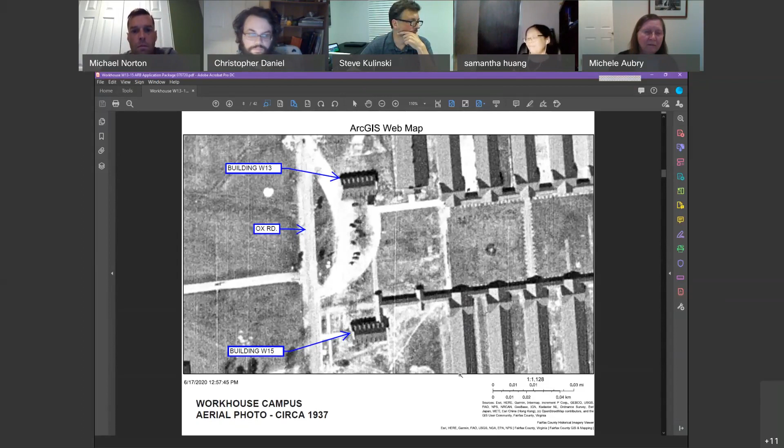All right, Ms. Murray. Thank you very much for your presentation, and I look forward to seeing this space developed. Thank you. Mr. Zellman.

Chris, this is Laura. Mr. Zellman might have left. He let me know he had to leave at 8:15 tonight.

Okay, well then I'll provide my feedback. Overall, I'm pleased that these buildings are getting the repairs and TLC they much need. I think I share much of the concerns some of my fellow board members have about the amount of tree cover being proposed between the two structures.

Looking at the proposed landscaping plan, there's an existing sidewalk that passes underneath the extended porch on one of the buildings on 15. It moves around to the rear of the building. I'm wondering why we're not taking advantage of that pathway, because it looks like on the plan being proposed, you're building a new path instead. Is that my understanding?

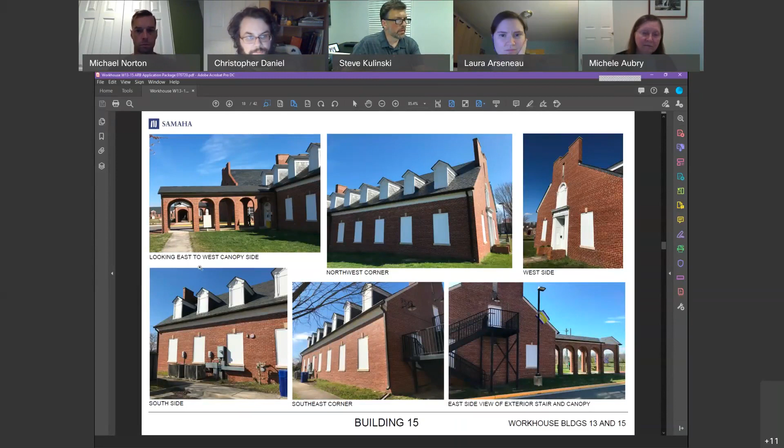We're actually trying to use and align these paths to connect to our new proposed plaza spaces. Let me just get back to that.

There may be some minor misalignment in my understanding, but I think the sidewalk I'm talking about, the one that goes underneath and connects to the portion of 15 that juts out, aligns roughly with this plaza path, I thought.

Those pathway connections are still being made. They're a little more subtle, and they actually come from the parking on either side, opposite Workhouse 13 and 15. They come around and turn 90 degrees, and they connect and go through either side of the far end of the plaza and through what we're going to call, for the time being, the portico.

So we're trying to use that existing connection while introducing new gateway entrances off of the multi-use path. The problem I have with that is I think we're almost creating a funnel on the view to the main quad space.

I do like the connection to the multi-use path. I was going back all the way to 1937 because that's as far back as the aerials go. I wish we had what Elise was talking about, and I agree, I wish Irma was still with us because she would know. But I do think it's a little tight, is what I feel like right now, particularly because we've been very clear with the Workhouse Arts Center and with the quad itself about how open we want to keep that. The view from Ox is pretty clear, you can see right in, and I'm worried about how much this is going to constrain that.

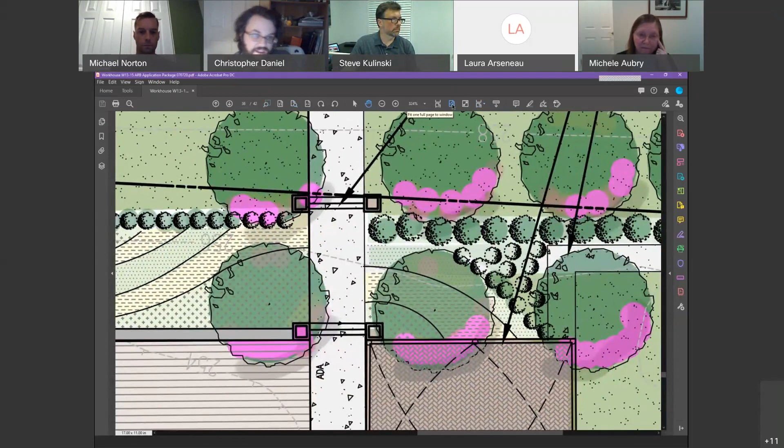I like the concept of having something there and making that usable space because it makes it more alluring. It creates opportunities, which I think is the big goal we want with the workhouse, the likelihood that there are opportunities there. But I also don't want to break up the dialogue I see with that open space that traditionally was there. So I'm having a hard time visualizing some of it, and I think part of the challenge is the assembly area.

I'm looking at it from a plan view, and then from an elevation view, and having a hard time seeing how we're affecting that viewpoint. Because I think that's a selling point to the workhouse, as well as a historic value, being able to see down there. If something is going on, I want to know. I think Sam made that point as well when she was bringing it up.

Yeah, if we could be talking about some kind of change to the trees in the center area, and I don't know if the county has the ability to render that in a way that makes it a little easier for us to understand.

That's where my general unease comes from overall in this portion. With the buildings themselves, I'm happy to see that, and would hope that the quicker we can get that through, the better, so we can get work on those happening and folks can begin using them. But that's all I have.

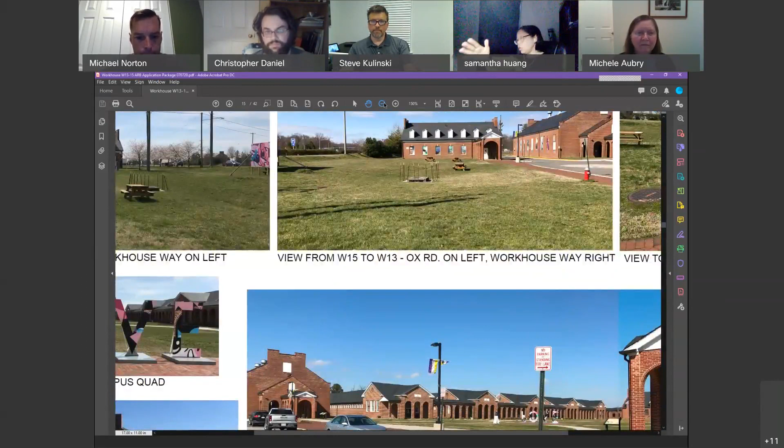I see you have a very long section going through the plaza, and the land between building 15 and 13 is slightly higher than the main quad. So by introducing more people to the land between building 15 and 13, I like that idea. The people there does make that space start to getting alive.

The vision I'm having is we always see the open space and then we see the main house at the end of the quad. Now we're adding another layer in front of it. How to balance this, I do not have an answer for right now. I like trying to put activity in that space, but I also do not want to see the openness and the main building at the back start to blur.

Okay, well, I just wanted to point out that at the moment it's a little difficult to see really that far in, and we have the signage up currently precisely because we're hoping to get the visitors' attention as they drive across Ox Road. And it is a fairly wide space there between the two buildings.

I think if it could be a layer type of landscape to just shade a little bit along the sides and maybe give it a little more interest, that will still remain fairly open while still creating some interest along that view. That way we can sort of replace that signage with a more natural setting.

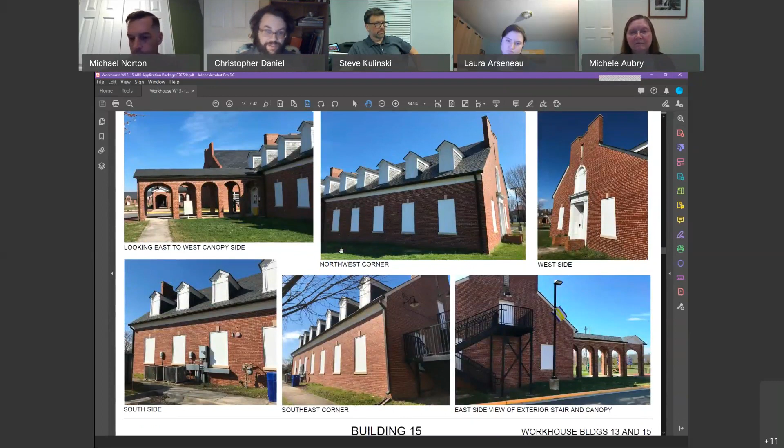From my perspective, while I'm concerned about the views, I'm also concerned about maintaining the character of the landscape and layout that exists there. So I'm trying to express a lighter touch in some areas, or see if we can ease back a little, still do something, but not give a false sense that this has always been a plaza space. If it's going to be a new plaza space, it needs to be distinct in a way that makes folks go, well, this is definitely different.

Like the materials you were suggesting, this stage area stands out from the main plaza, which is much more of a plain space meant for things to be temporarily erected and then taken down. So I'm not against that, but I'm not looking at it just from the view from Ox Road. I'm legitimately looking at it from the view from above at the overall landscape. I'm trying to marry all those aspects in my mind.

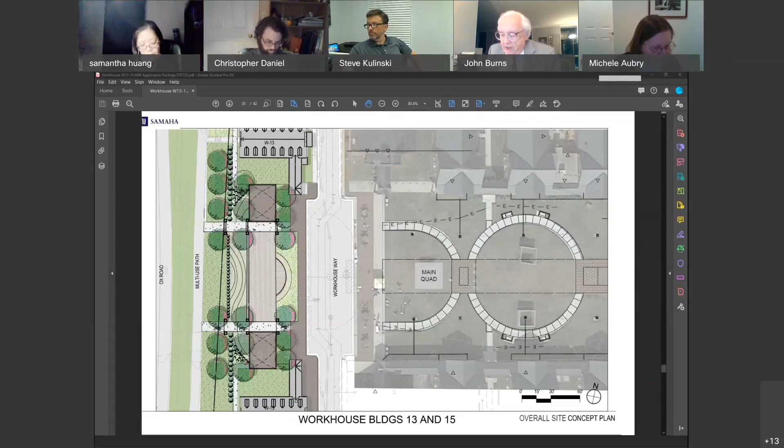I'm hearing a lot of static. I don't know if anyone else is.

I am, thank you. Right, and are you going to control the presentation, or are we? I will, let me share. Okay, you're in.

Thank you, Mr. Chairman and members of the Architectural Review Board. I'm Greg Wiedemann, Principal of Wiedemann Architects. I believe Andrew Dan and Gabby Castillo are also with me this evening, who are my staff architects.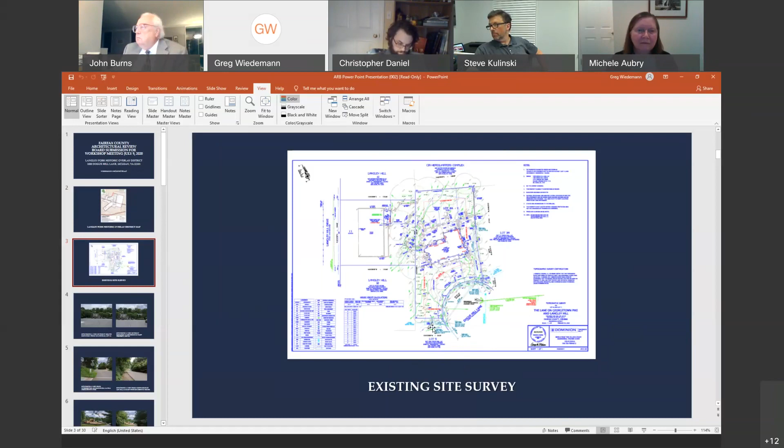The house, as was mentioned, was built in 1996 and underwent a renovation in 2005, at which time the front appearance of the house was changed. This porch was added, and this continuous element here replaced the original design.

This is the house in particular that we're speaking of. There's a neighboring house directly to the right. One of the things that our client observed was that this house seems to be very low. Unlike the other houses, such as the one to the right, the roof seemed to be minimized.

Let me first take you through this. This is the route from Georgetown Pike. The Scoville property is to the right, and the meeting house is to the left. As you can see, you can only get a very small glimpse of the home as one goes down Langley Hill Lane. This dirt area right here is where the new home is going to be built.

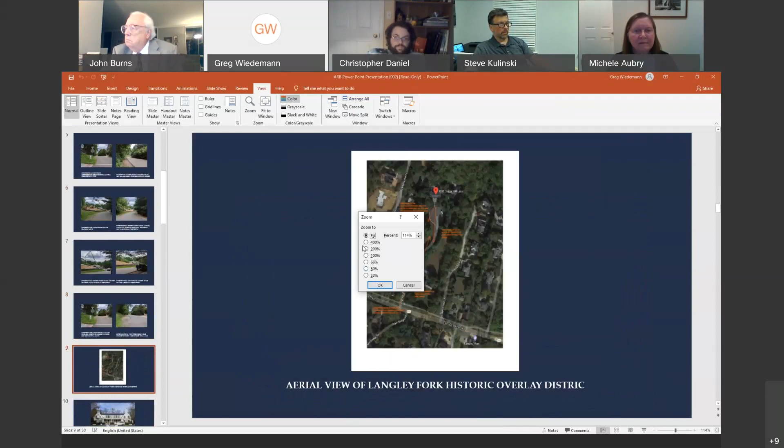So the road swerves around lot 5 and leads to the cul-de-sac, which screens the house from the neighboring properties. Again, the view from the meeting house and the view from the Scoville property are largely obscured by trees. So from the meeting house, the line of sight to the house is largely blocked. And the same is true of the Scoville property, which is bound by trees along this line. So one could not see the Scoville property or the Langley Hill Friends Meeting House from the property itself.

So one of the things that... just a minute. So it has a symmetrical facade with these two side wings. This is the existing condition. We're proposing two changes to this. We're proposing to change this quoining, which is in brick, and introduce a matching Carderock stone in the main body of the house to contrast with the two brick wings. That's how the center portion of the house is rendered on the rear facade, which I will show you in a minute.

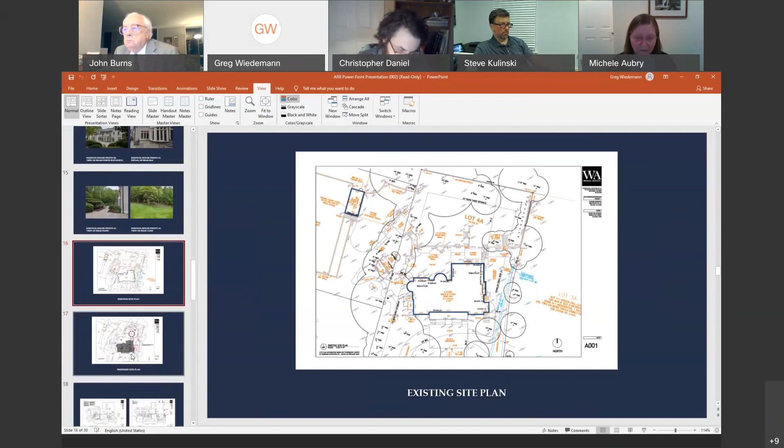The changes that we're proposing are two in the front that I mentioned earlier. We are also taking an open entry here off of the driveway and enclosing it to provide an enclosed access to an elevator which exists in this location. And we're adding a 1-story glass link to a garden pavilion, which will sit in the rear of the property.

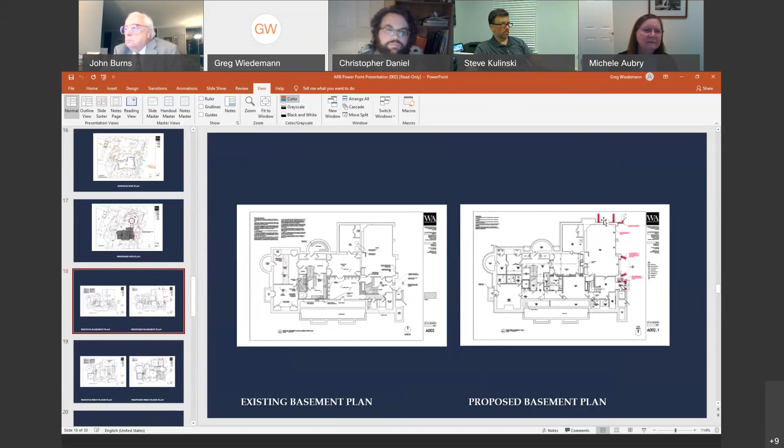We're making a number of interior changes at the moment, but what I'm here to present are the changes to the exterior. This is the lower level of the home, which is on grade on the right-hand side and below grade at the front of the house. You can see that we're enclosing the access to the elevator. We're introducing a bay on the 3 garages, and this is what you're beginning to see, the link to the solarium.

The changes on the first floor are modifications to 2 doors on the back of the living room, increasing the glazing in this particular bay that looks out into the garden, repositioning 2 windows to be symmetrical about a reworked breakfast room and family room. And here you're seeing the introduction of another glass bay that echoes the others that are currently existing in the house.

At the rear of the property, we are introducing a glass link to the octagonal solarium. It has a glass skylight and glass walls. We're calling it the winter garden. You can walk through from the breakfast room out to the plaza, the patio in the back, or directly into the octagonal solarium. This shows the change to the first floor.

I mean, to the front elevation, excuse me, where we've eliminated the brick quoining and added the matching Carderock stone. And we're proposing to increase the roof by slightly over 2 feet, allowing the two side wings to be more secondary to the massing.

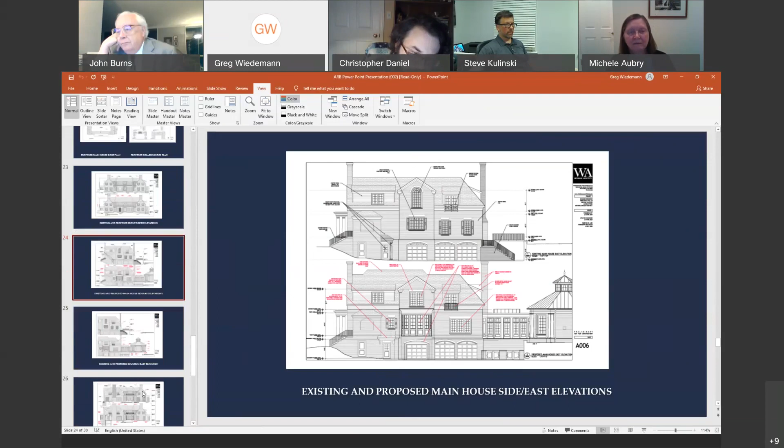In the rear, this is the link. We're proposing to change some of the railings, which currently do not meet code. And we're proposing a brick—this is painted brick, matching the house.

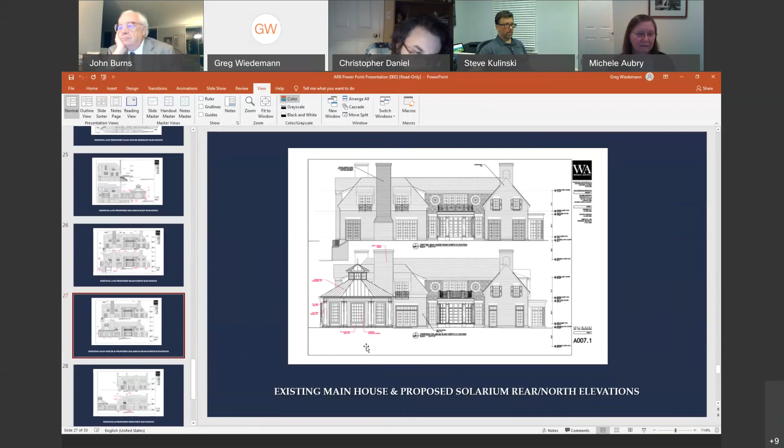All modifications to the main roof would be continuing the existing slate. In the garden pavilion, we're introducing a standing seam copper roof. The link that connects it to the house would also be a flat copper roof, which is here. All the windows are wood windows that match the existing house, with painted brick and painted columns and trim with gaslight lanterns.

The garden pavilion is designed so that the glass enclosure's windows can be lowered so that it can be converted to a screen porch. And it has an oculus to bring in light and a coffered plaster ceiling. I think that outlines what we are proposing. I'm open to any questions.

Well, thank you very much for the presentation. I will go through the roll call of members of the board for their own comments. Ms. Aubry? I have no comments at all, no questions. Thank you.

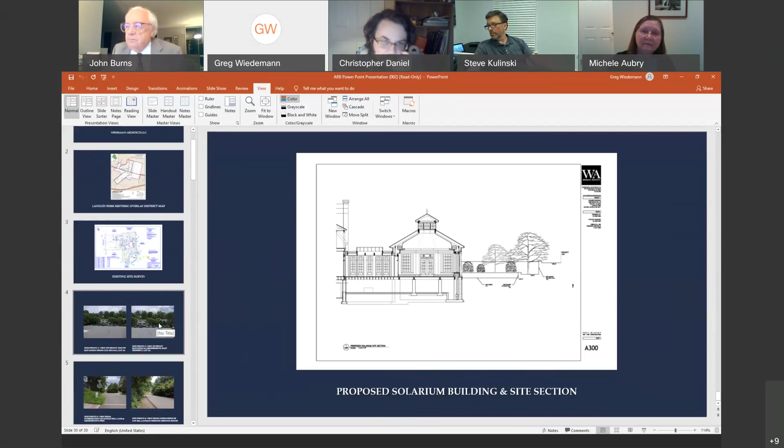Mr. Daniel: I was trying to decide where my thoughts and comments were. Can we go back to the map in the district? Is there a way for you to zoom in? Thank you, exactly what I'm looking for. I'm sorry. That's all right. I don't know why I'm saying that when I could probably pull up the file on my desktop. I probably could do that. So yeah, I can actually do that. Never mind, okay.

So I think, in general, I don't really have comments on the solarium. My biggest concern was the visual effect of raising the roof. It seemed, based on the information provided, that was not going to be a concern, based on what I'm seeing there. So I don't really have a great deal of comments at this time.

This roof is a mansard roof, and the slope of the front of the roof is less steep than the back. So one of the things we're doing is making the slope of that center roof match the back at the same time. But I guess the other question is, what's going on right in front of the house?

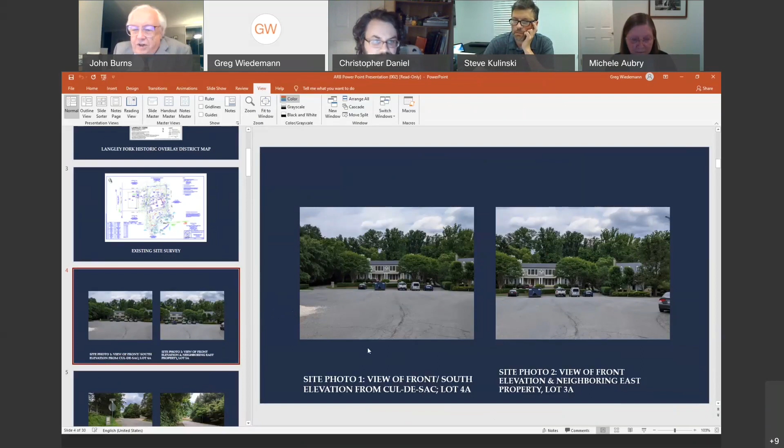Well, Daniel, that was the previous applicant we had tonight at 1004—that's lot 5 here, which is 1004 Doak Hill Lane. That's that large home you reviewed earlier this evening. Okay, no, I didn't even put those two together. Right, this was originally completely wooded before that site was cleared. But I do think that house will block any view of our client's house upon approach.

Well, I think you make a valid point right there, but I don't have any further comments. I did not put the location of those two houses exactly next to each other like that. But thank you. Mm-hmm, yes. Okay, thank you, Mr. Daniel.

Ms. Huang? I have no comment. Thank you. Okay, Mr. Kulinski?

Yes, just want to thank Mr. Wiedemann. I think this is appropriate to the district, what you're doing, and some of the improvements you make really help. What is already a nice house, I think you're making it even better. So congratulations. Thank you. Okay, thank you, Mr. Kulinski.

Ms. Aubry? I have nothing to add. Okay, Ms. Orr? I understand their need to pop that roof up a little. So I think you've done it very subtly and it looks nice.

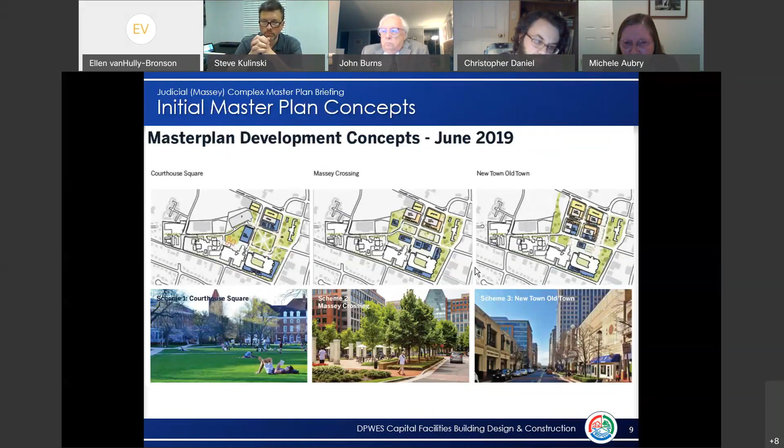We really pared it down to Massey Crossing and New Town Old Town. The differences between them, they both can accommodate the 2 million gross square feet. Structured parking would be included in both concepts. Garage B would remain on the site.

Garage B is this one here that backs up to the Fairfax cemetery there. And in the Massey Crossing one, the buildings would be a little bit taller and the green space would then be a little larger. Whereas on New Town Old Town, the buildings would be shorter and the green space would be more compact.

This is just a bird's eye view looking at the 2 different plans.

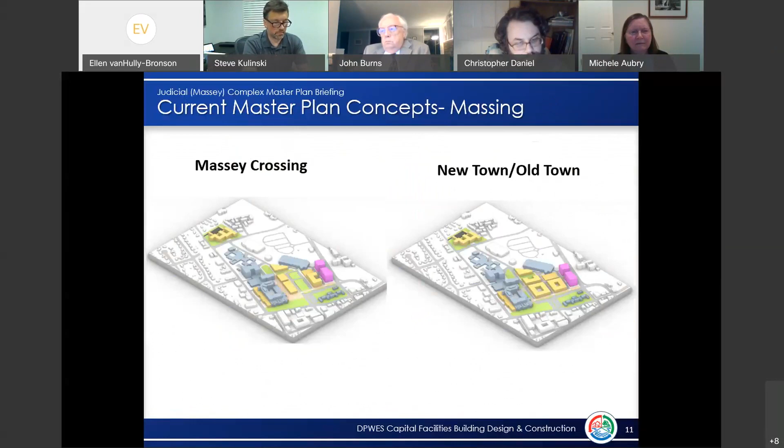Something else that we don't know if you all are aware of, but it's something that we've been grappling with and working with this developer. He is adjacent to our site. This black line here is the property line between the judicial complex and the city of Fairfax. This is privately owned property in the city. And a developer has consolidated the 3 parcels - it's the Wells Fargo Bank, a restaurant, and a small office building. And he is proposing to put a hotel and a performing arts center on the site.

The city of Fairfax is very excited about it. We have some mixed feelings about it. We think it'll be a great activation to our site and to this corner of going into the judicial complex. But we are very concerned about the massing and the size of it.

It's actually 10 stories in height, and we feel it really overshadows the historic jail here and the old courthouse, which is right here. So the city of Fairfax planning folks and the county planning staff have been working together with the developer.

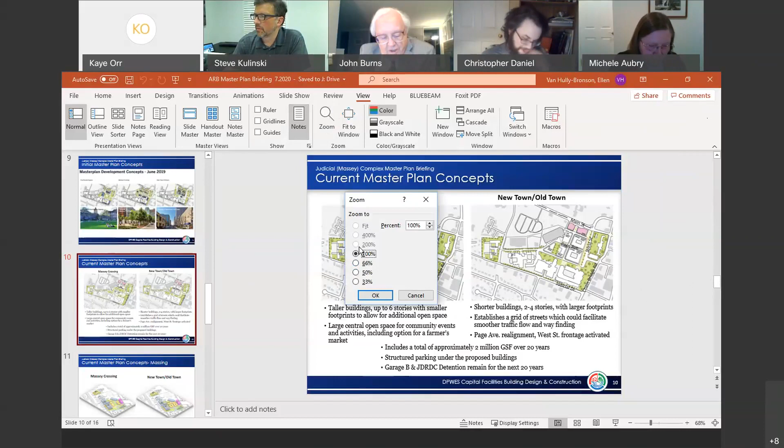I am appalled at the proposed mass of the hotel and performing space. I think that will overwhelm the historic jail, and it will overwhelm the church that's across the street from it. I'm stunned that the city of Fairfax would allow such a large structure in that particular location, in a very sensitive historical area within the city.

I can't speak for them, but Elise, thank you for emailing the mayor. That's really quite something. I'm a little concerned that it seems to be a fait accompli, because your New Town, Old Town, and Massey Crossing both seem to align with an axis that goes through the proposed new development.

That's on private land. Ms. Swan's suggestion about a land swap or some sort of horse trade that might allow that massing to be reduced, I think would be in everyone's best interest. But that's a big object in a fairly steeply sloped part of the site, if I remember my topography correctly. And so that will make it even more overwhelming in scale because of the slope of the site. That's a primary concern of mine.

You had mentioned that the police evidence and storage, which I believe originally was the police administration building, is going to be replaced. And I noticed that it disappeared on the maps. You didn't make any mention about that. That is something you might want to consider as a heritage resource.